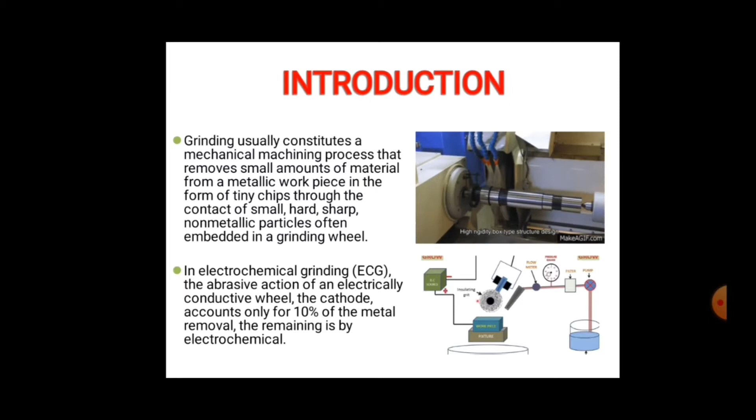This is the definition or main function of electrochemical grinding. Electrochemical grinding is an electrolytic material removal process that involves a negatively charged abrasive grinding wheel, a conductive fluid, that is an electrolyte fluid, and a positively charged workpiece. The workpiece material corrodes into the electrolyte solution.

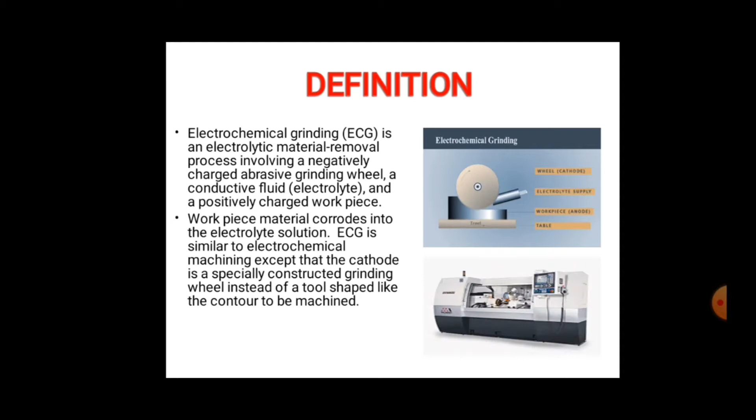ECG, that is electrochemical grinding, is similar to electrochemical machining, except here the cathode is specially constructed as a grinding wheel. It is considered as a tool. Next is a schematic figure of the ECG process.

Now this ECG process is in the form of three zones. First of all, we can see a grinding wheel which is negatively charged, a workpiece which is positively charged, and a nozzle similar to the one which carries coolant in a conventional grinding process. It is provided with an electrolyte fluid to work for the removal of material.

In ECG machining, it takes place in three zones. Material removal in zone 1 is purely due to electrochemical dissolution, which occurs at the leading edge of the wheel. In zone 2, abrasive particles remove material in the form of chips and also remove the non-reactive oxide layer, which promotes more electrolytic dissolution.

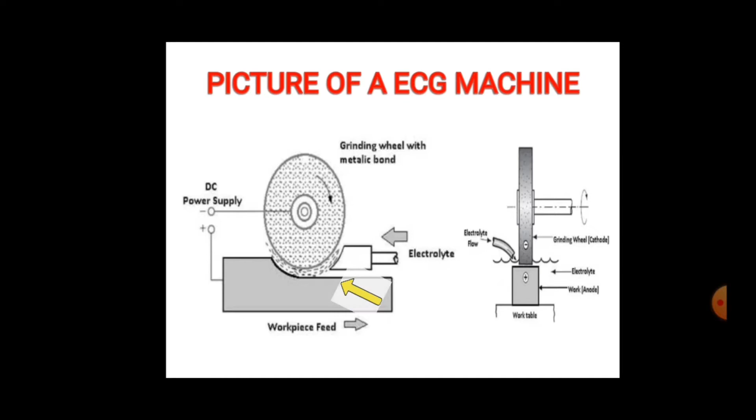And in zone 3, machining starts where the wheel lifts off the workpiece, and scratches or burrs are removed in this zone by electrochemical dissolution only. Next is the working process.

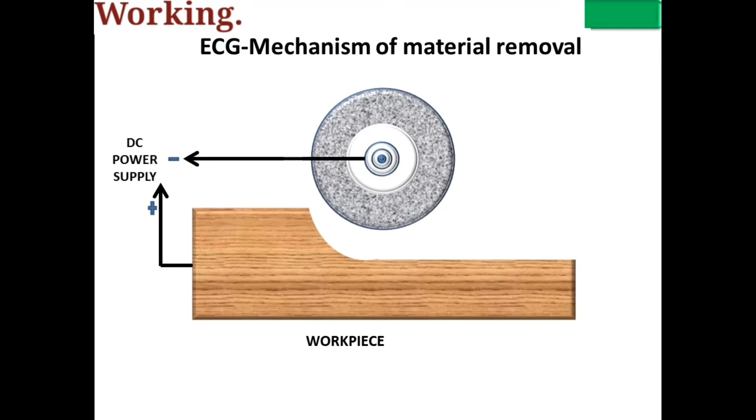Now here the workpiece and the wheel are separated by an electrolyte fluid. The workpiece is connected to the positive terminal and the tool, that is the grinding wheel, is connected to the negative terminal. Also, diamond or aluminum oxide particles are embedded on the grinding wheel as insulating abrasive material and set with a conductive bond material. A nozzle similar to the one which carries coolant in a conventional grinding process is provided to enable the flow of the electrolyte fluid to the work-tool contact area.

A constant inter-electrode gap of 0.025 mm or less is maintained considering the grain size of the abrasive particles. The electrolyte is fed through the constant inter-electrode gap. The grinding wheel is given a certain speed in RPM and the electrolyte is supplied in between the tool and workpiece.

First, the reduction in IEG results in the contact of abrasive particles with the workpiece, and material is also removed by the abrasive action. With the help of abrasive particles, material removal is done in the form of chips, and they also remove the non-reactive oxide layer, which promotes more electrolytic dissolution.

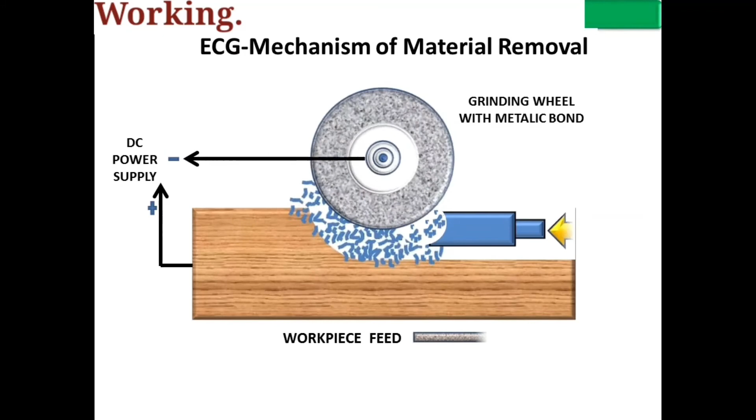In this process, the major material removal takes place by electrolytic action, which is around 90%, and the rest, around 10%, takes place due to the mechanical grinding action. Current density has a significant effect on surface finish and material removal rate; with higher current density, both material removal rate and surface finish improve. Also, this is a cold process, as the temperature generated is less than 100 degrees Celsius.

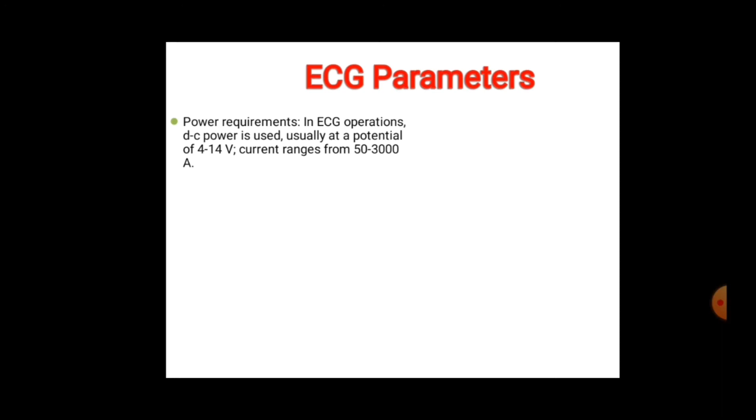Next are the parameters for the electrochemical grinding process. First is the power required in ECG operations. A DC power supply is used, usually at a potential of 4 to 14 volts and current ranging from 50 to 3000 amperes. The next parameter is current density. Generally, current densities range from 77 when tungsten is ground to 230 amperes per centimeter square when steel is ground.

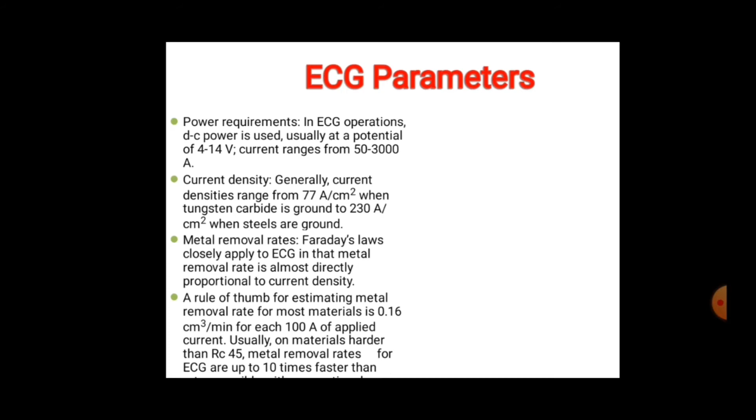Next, the material removal rate. Faraday's law closely applies to the system in that the metal removal rate is almost directly proportional to the current density. A rule of thumb for estimating the metal removal rate for most materials is 0.16 centimeter cube per minute for each 100 amperes of applied current, usually on material harder than RC45. Metal removal rates for ECG are up to 10 times faster.

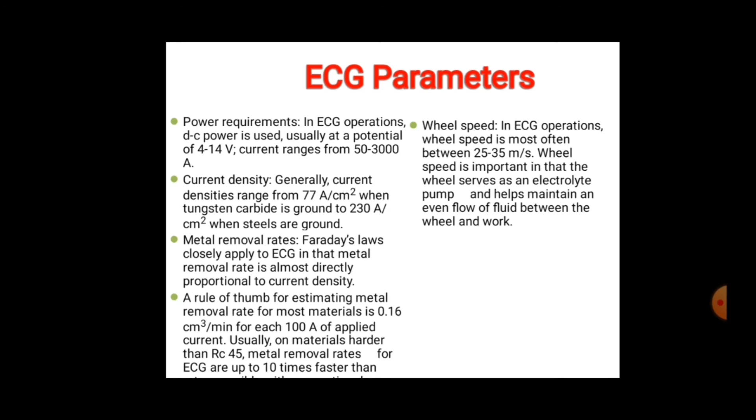Next, the wheel speed. Wheel speed is most often between 25 and 35 meters per second. Wheel speed is important in that the wheel serves as an electrolyte pump and helps maintain an even flow of fluid between the wheel and work. Next, tolerance: with careful control of electrolyte temperature, specific gravity and conductivity, it is possible to produce a part within 0.005 mm. Next are the important advantages of ECG.

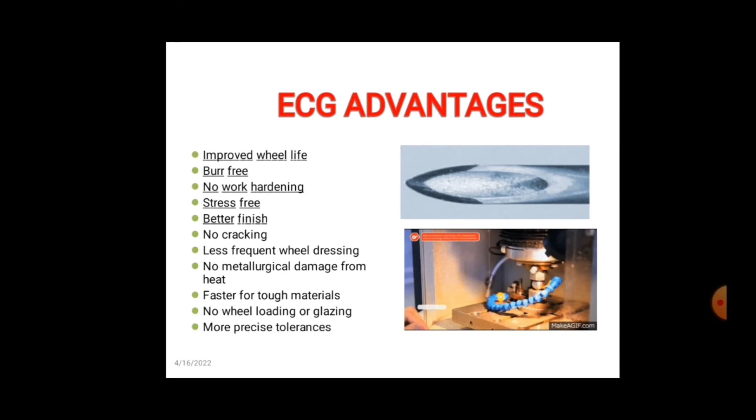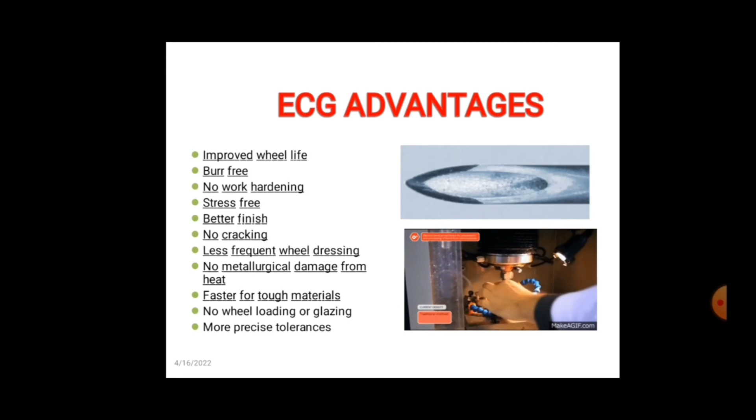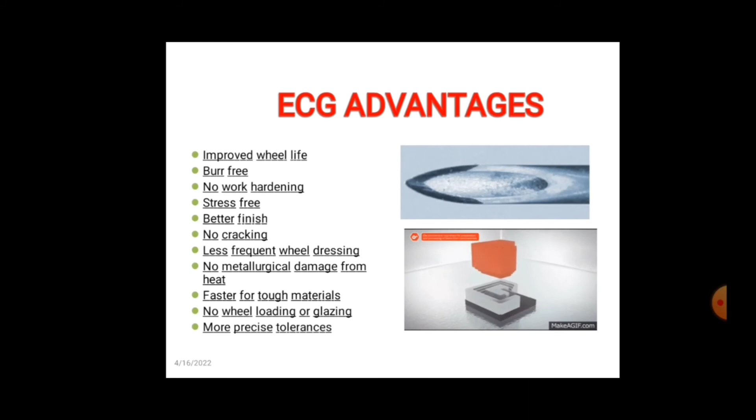The first one is improved wheel life, as there is no direct contact between the tool and workpiece. Next, it is a burr-free environment. No work hardening is done. It is also a stress-free environment. Also, we can achieve better finishing, with no cracking. Less frequent wheel dressing is required. No metallurgical damage from heat. It is faster for tough materials. No wheel loading occurs, and lastly, more precise tolerances can be achieved.

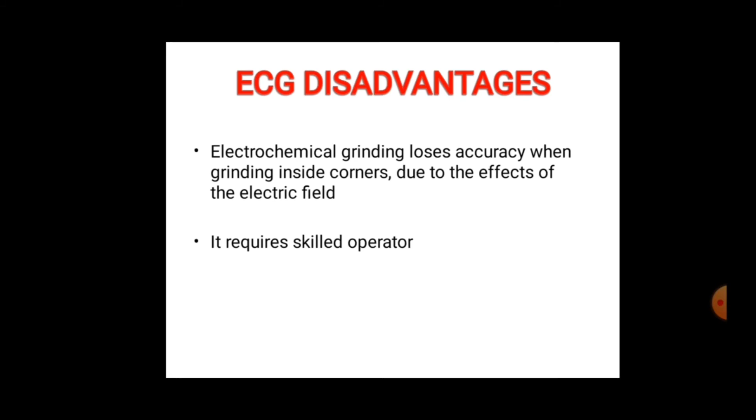Next are the disadvantages of ECG. First, electrochemical grinding loses accuracy when grinding inside corners due to the effect of the electric field. Also, it requires a skilled operator, which increases the cost of the system. Next are the applications.

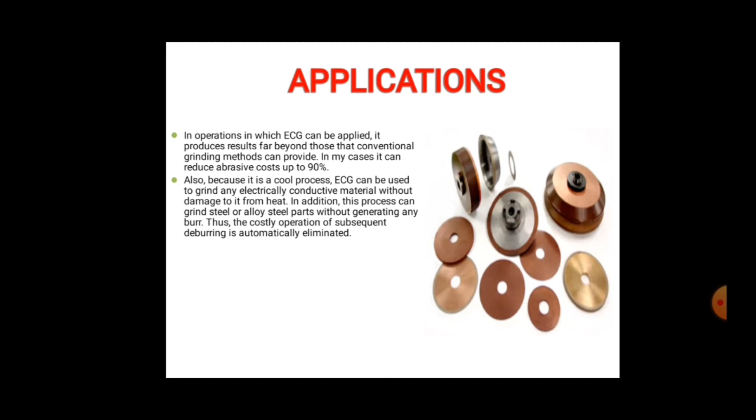First, in operations in which ECG can be applied, it produces results far beyond those that conventional grinding methods can provide. In many cases, it can reduce abrasive cost by up to 90%. Also, because it is a cool process, ECG can be used to grind any electrically conductive material without damage from heat. In addition, this process can grind steel or alloy steel parts without generating any burrs. Thus, the costly subsequent deburring operation is automatically eliminated.

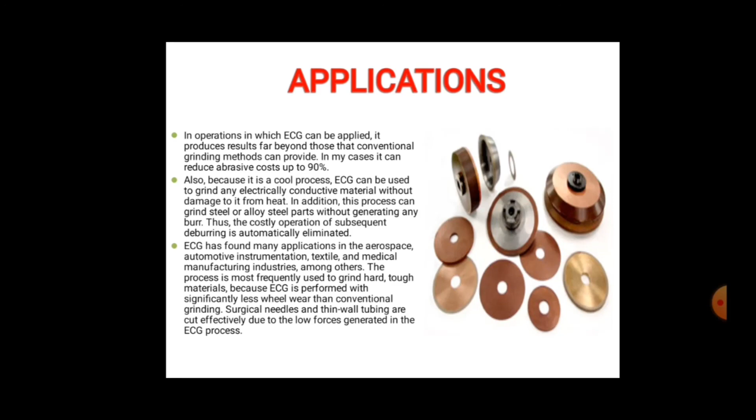Next, ECG has found many applications in aerospace, automotive, instrumentation, textile, and medical manufacturing industries. Among others, the process is most frequently used to grind hard, tough materials because ECG is performed with substantially less wheel wear than conventional grinding. Surgical needles and thin-walled tubing are cut effectively due to the low forces generated in the process. Thank you.